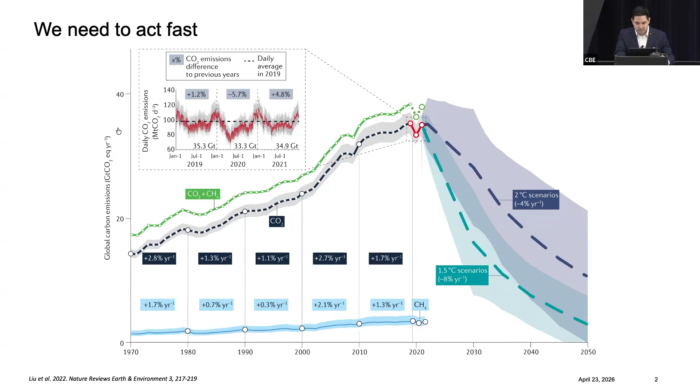So what pushes us to work every morning, and my students and the scientists that work with me at my group, is that we need to act fast, right? So if we look at the decarbonization scenarios that we have been given by the IPCC, particularly the ones considering the 1.5 or the 2 degree scenarios for global warming, we are already at a tipping point where we need to start decarbonizing heavy emitter industries very, very rapidly. And concrete is one of these, and this is why we think that there is a new infuse of energy to concrete technology and to cement science, because this became an urgent and pressing challenge for this century.

So when we look at things in perspective to all the materials that we use, and actually the stuff that humanity produces on a given year, we see that 90% of the materials that humans produce in any given time are related to construction. And this is why I think that this center is so important. And everybody here in the audience should feel so important, because we are working on a big problem, right? Like 90% of the stuff that we make ends up in construction. So it's by far the industry that consumes most of the resources.

And from that 90% of material going to construction, 75% is concrete or cement-based materials, mortar renders, or materials that contain a certain amount of cement. This is a very interesting study that we published in Nature recently. And there have been also

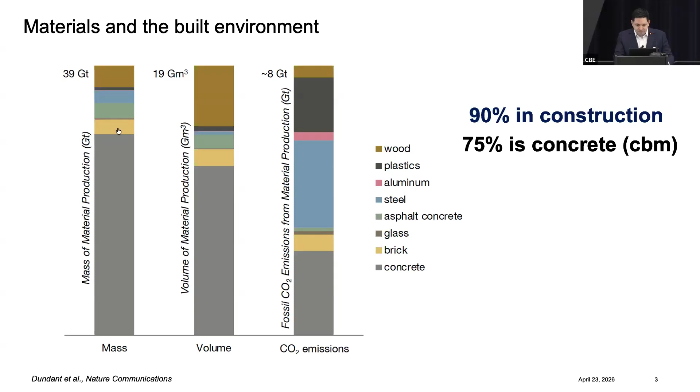quantifications by other authors, for example, looking at replacements for concrete, right? Because we know that concrete is a carbon-intensive material. But actually, for example, if we were to replace concrete by something like timber, we would need a forest 1.5 times the size of India just to replace 25% of our cement consumption. So that puts in scale how big this industry is and how challenging it is to even think to replace it by something else. Our vision is that concrete is the material that will take us to the future with sustainable development, but to do that, we need to make it better.

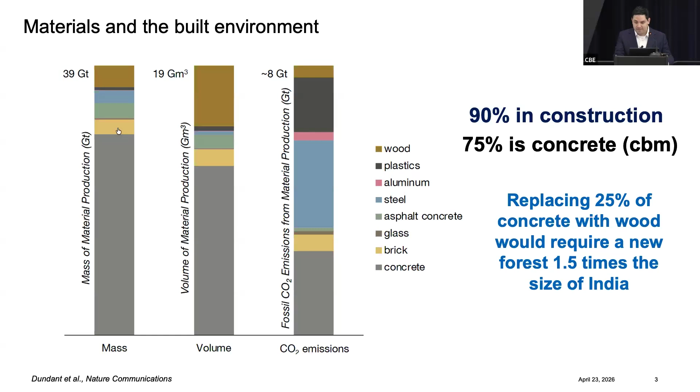The other thing that I think is important to realize is where carbon in infrastructure is coming from. And there are essentially two categories: embodied carbon, which is the carbon that is put into the building in the materials and at the moment of construction, and then the operational carbon. And while these two components are important, I just want to highlight in this slide how high and how overwhelming that embodied carbon component is, especially at the beginning.

And the other point that is important here is that the embodied carbon, once encapsulated in the building, there is nothing that we can do about it. And this is why we can always upgrade operating technologies, but there is nothing that I can do with the carbon that is embodied in the concrete, essentially. This is why it's so important to transition swiftly towards low-carbon concrete technologies so that we can address that embodied carbon component.

The other important point here is that from a net present value of that carbon content, it is much more valuable to address the embodied carbon from a decarbonization strategy point of view than operational emissions that may come in many, many years. And of course, this is for buildings, but in infrastructure, this difference, this decoupling between embodied and operational is even higher.

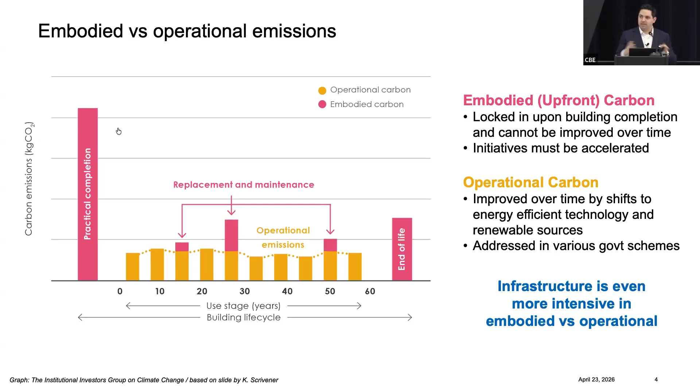And we may think, being in the global north, so I come from Europe, now I moved to the US, that construction is a solved issue, that we don't need to do this. But the reality is that the global south is the region of our planet that is undergoing strong development now. And it's estimated that 3/4 of the infrastructure that will exist in 2050 is yet to be built.

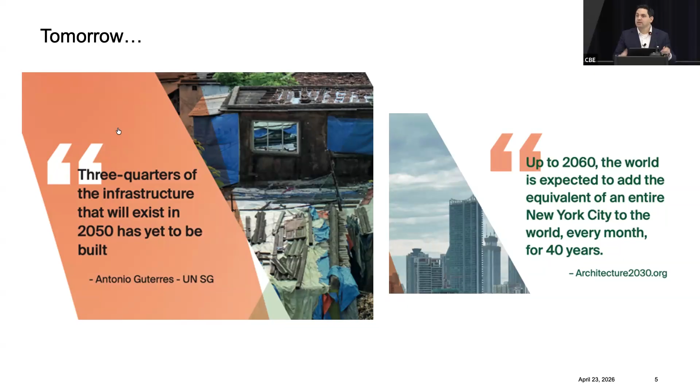So we are going to need a lot of materials, and we are going to emit a lot of CO2 materializing this infrastructure that is only needed for these communities to achieve decent and humane quality of living. And this disparity on the projected demand of infrastructure is also reflected, of course, in the demand of cement.

So you might have heard that China is the main producer of cement in the world, but China's population is already declining, cement production is already declining, there's many, many plants that are shutting down, and we forecast that by 2050, actually, the regions that are going to be contributing the most to the cement production and therefore to the CO2 footprint associated with the concrete industry are going to be Africa, Southeast Asia, Latin America, and India instead of China. So we have a shifting polarity of where cement is being produced, and this is well correlated with the need for infrastructure in these regions.

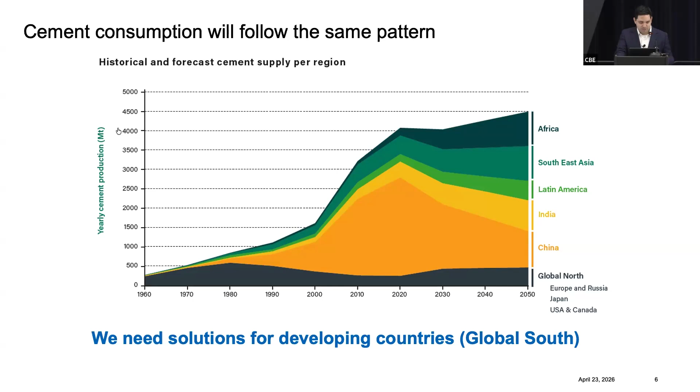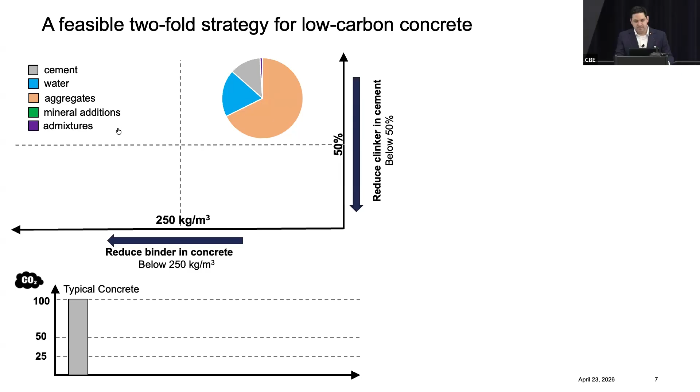So one of the things that we work on, and one of the concepts that we have developed in my group, is something that we call the twofold strategy. So something that you might have heard is that the United States cement industry is transitioning from ordinary Portland cement, what we call type 1-2, the classical stuff that we used to get, to blended cements, type 1L, in the future, not so far away future, I guess, type 1T, ternary blend cements. So we're moving towards that.

And what we do by doing so is to reduce the amount of clinker that we have per unit volume of concrete. And this is something that we have worked intensively in the past, particularly developing a technology called LC3, limestone calcined clay cements, while I was still in Switzerland. But there is another technological component that I think is really interesting for concrete producers, which is, well, we can also address the concrete mixture design. We can reduce the paste volume. We can use fillers in order to replace part of the cement paste, so to reduce even further the content of clinker, the carbon-intensive component, per unit volume of concrete.

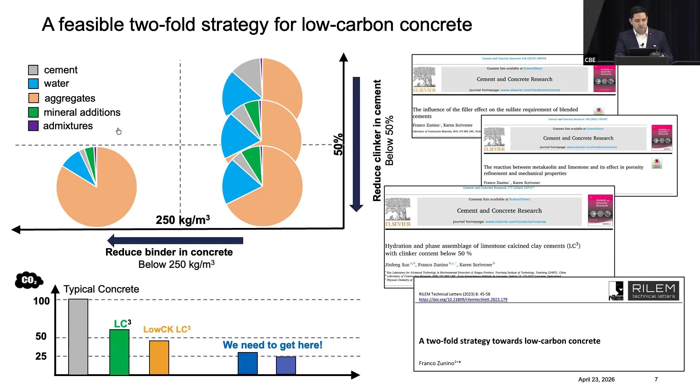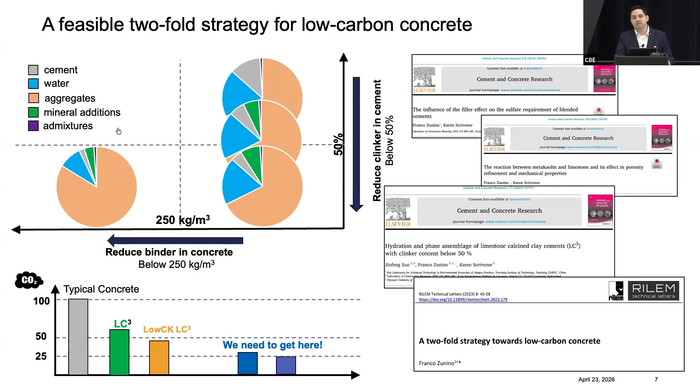And at the end of the day, what I'm showing here in this plot is that we can achieve, and we have shown this with sound evidence, concrete with comparable properties with about a quarter of the CO2 footprint of what we are producing today. So concrete today, and I want to be very clear with this message, is an environmentally friendly material today, but we use so much of it that the carbon footprint is very, very important. And there is a lot of room and technological space for doing things better in the future. And we have a long pathway ahead.

So if we compare, for example, the reality of the United States, which is the orange fringe here in the upper band. So these are the numbers that the NRMCA reports every year, the National Ready Mix Concrete Association. And this is the average CO2 footprint for different concrete strengths. We can compare that with the UK, which is the numbers in yellow just below, what Chile is doing, which is a country that is famous internationally for using a very low clinker factor for many, many decades, and what we have been accomplishing with LC3 in green at the bottom. So essentially what this plot is illustrating is that for any given strength that you want, we can make that concrete with about a third to a quarter of the CO2 of what you can find in the market today.

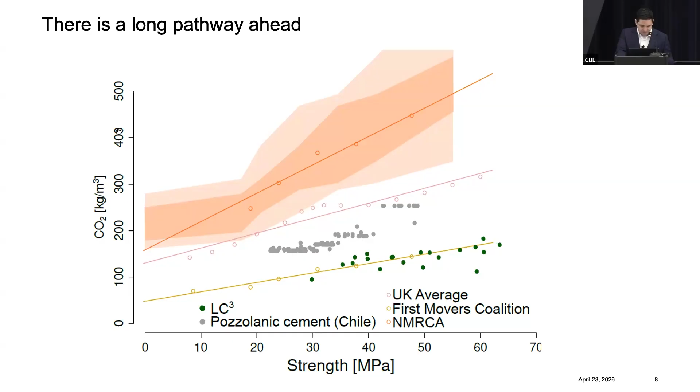And on these decarbonization strategies, and to close my pitch talk this morning, I want to illustrate that this is interesting and appealing for industry because these are also opportunities that likely will cost us the same or even have the potential to reduce production costs.

So if we look, for example, the marginal costs of clinker production is about $30 to $50. This is not market price, please. This is what it costs our cement producers to actually make clinker. And reducing cement content, reducing paste content, optimizing the concrete mixture design are essentially things that we can do in everyday civil engineering practice and are likely going to be very low cost or enable us to even lower the cost of concrete compared to what we have now.

And I think that there is this interesting dichotomy between this and the alternative, which is like we will just take the CO2 and carbon capture and store it. The best estimations that we have is that if we go down that pathway, it's going to increase the price of cement 2 to 4-fold the prices that we have now. And in an industry with small margins where money is made out of bulk, it's going to be very difficult to justify this.

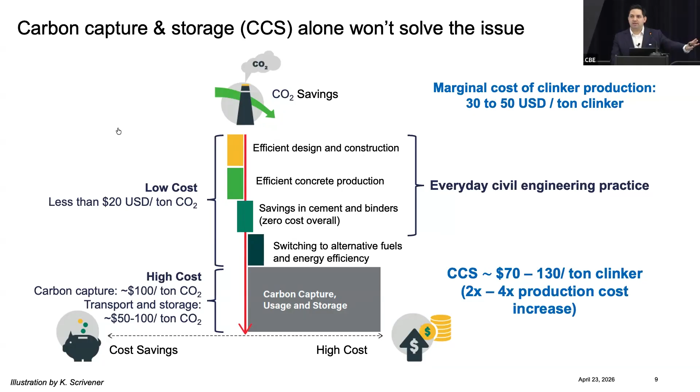And I think that the industry is already reacting to this reality by reducing the projects that we see of CCUS once public funding became unavailable for these kinds of things. And this is both in Europe and the USA. It's not necessarily tied only to political scenarios, but to the realization that it's going to be very complicated to make money in a scenario like this. So my message is that we should be doing everything else first before we even say the word carbon capture and storage.

So in this Nature paper, and this is my last slide, we illustrated different approaches that we can use to try to offset the increased amount of greenhouse gas emissions associated with this booming of development in the global south. Things like timber substitutions are not going to take us very far, and the main reason for that is the limited stock of the material that we have.

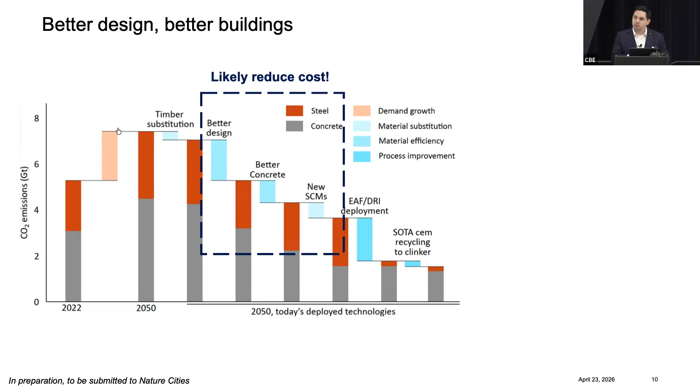But everything that I have discussed in this presentation, particularly better design, better concrete, and better SCMs to make blended cements, are likely to reduce cost and will take us most of the way, so that if we want to be carbon neutral, carbon capture and storage is going to be a much smaller amount of that CO2. So the message is less clinker in cement, less cement in concrete, and less concrete in the building.

So to conclude, my takeaway message: there is no magic solution. There is no realistic replacement for concrete. We're constrained by the composition of the planet on this. We have to reduce the clinker content, so that means continue moving towards highly substituted cements, and we need to help the cement producers facilitate adoption of these new and emerging cements in industry, and we are happy as academia to support industry in adopting these new formulations of cement that are going to become available in the country in the next 5 to 10 years.

We have to minimize cement content, so this is something that we need to work on with the concrete producers, and we need to optimize structural design, of course without compromising safety, which is a value that is above decarbonization in all cases. All the above likely lowering the cost.

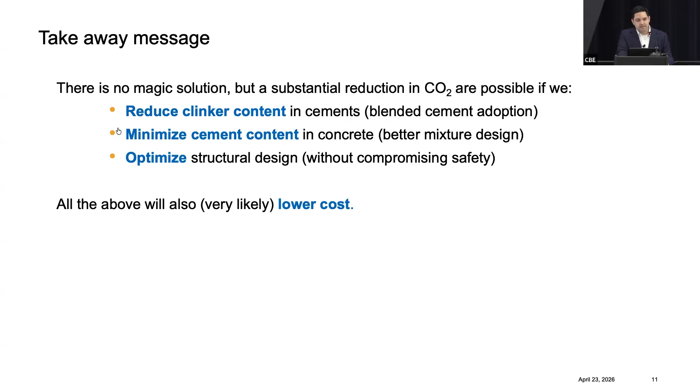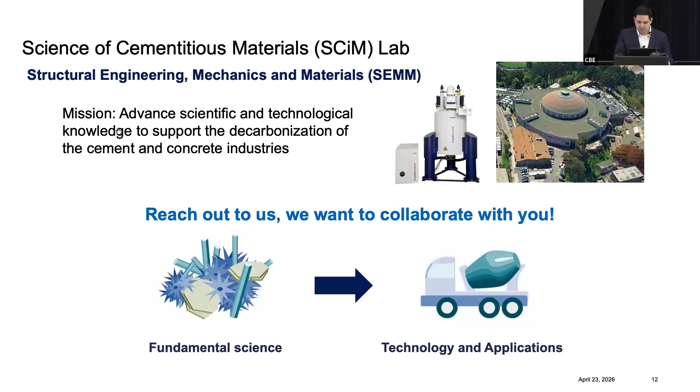And before moving to Q&A, I just want to briefly introduce my research group. My laboratory is called the Science of Cementitious Materials Laboratory. I'm actually trained in material science, not in civil engineering, although I'm a faculty at the civil engineering department here. So what we do is essentially developing fundamental scientific formulations and solutions and translating those for industrial applications. The most notorious of that is of course limestone calcined clay cements, which today is produced in every continent.